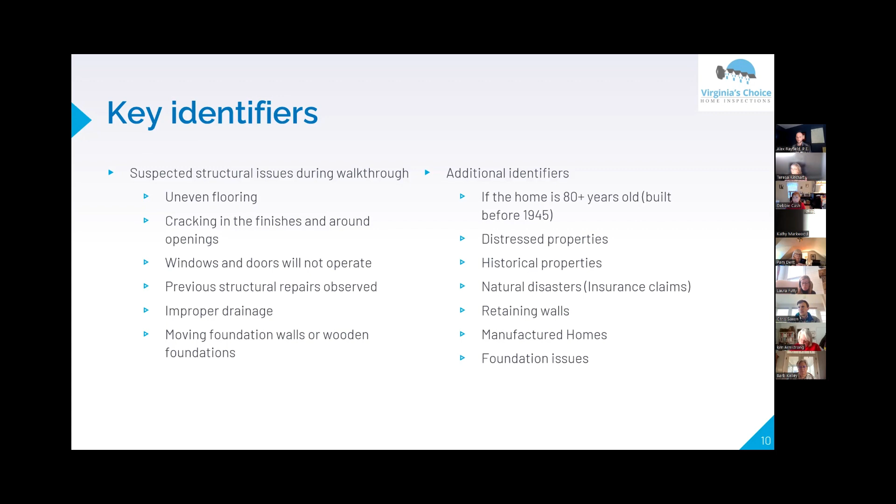A big one is once we get before 1945, the end of the Second World War timeframe, we saw a massive shift in how homes were built and the requirements from local governments and codes that came into place post-World War II really changed a lot of how building was done. So knowing the age of your home and the type of property can really help hone in on who we need to bring in later.

The first one I want to show briefly, which we've all seen before, is a little marble trick with some sagging or overspanning floor joists. This is an old farmhouse, I'm going to say from around 1860. Obviously the centers of the floors have deflected quite a lot, allowing the marble to roll freely across the second floor.

This might not necessarily mean there's something drastic to correct here, but it could key us into different types of framing methods, whether folks have been exposed to what's called balloon framing versus platform framing. That goes back to 1945 and before, even a bit before then.

Balloon framing is an old style of framing that we don't use anymore. It is not as resistant to lateral loading, wind, or seismic loading as can be seen in structures. Because of that, over 90% of balloon frame structures are no longer standing, or have been renovated into platform framed structures during a massive renovation, if the structure was well enough to take it on.

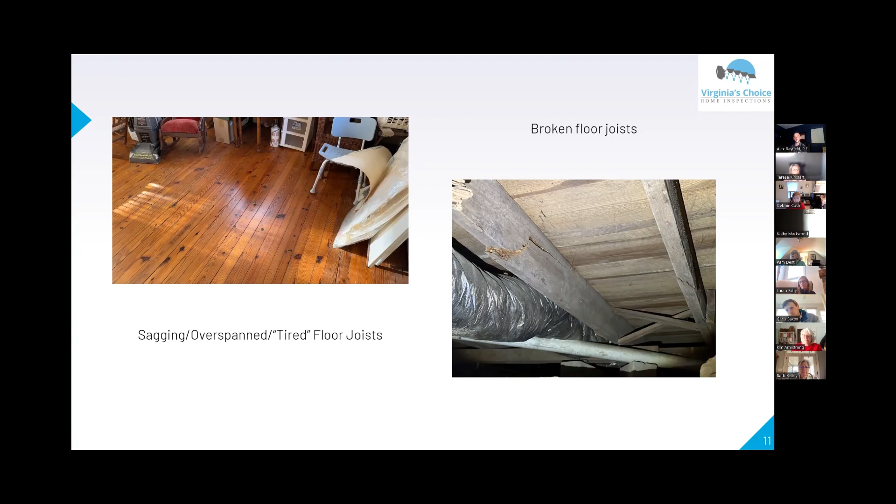The next thing: non-permitted residential renovations. This can be a tricky one, as there are a lot of contractors out there that flip homes. Many contractors do this very, very well, but there are always outliers that try to get one over on folks.

I was hired as an engineer, and I went back through county records and saw that no permits had ever been pulled for this renovation. It was a contractor that flips homes who had purchased the property a few months before, and 6 months later the house looked completely different and was back on the market.

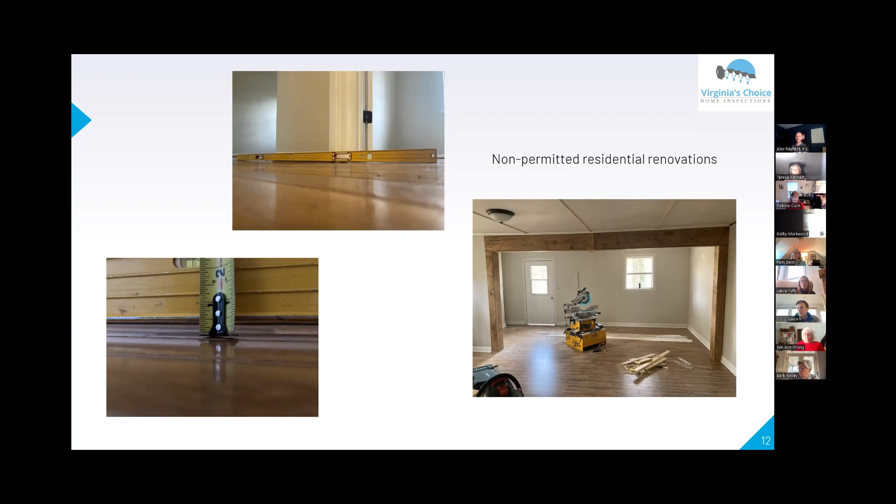There were a couple of lolly columns, very obvious in this case, that had been taken out of the centerline beam and just thrown in the corner—they didn't even take them out of the structure. This was a very obvious one, but it saved somebody a lot of time, money, and headache, since they really didn't have the time to take on something like this.

The next one, our lovely fights with the plumbers. I know just about every home has something like this at some point, depending on the amount of renovations and additions it's had. But if you ever see any cut floor joists, especially like the one we see on the right...

Then we might want to consider bringing in somebody with structural experience to prescribe a fix. More often than not, the fixes are relatively easy, painless, and cheap—sometimes only costing a few hundred dollars to fix one of these floor joists, depending on the amount of ductwork, plumbing, other penetrations, and accessibility involved.

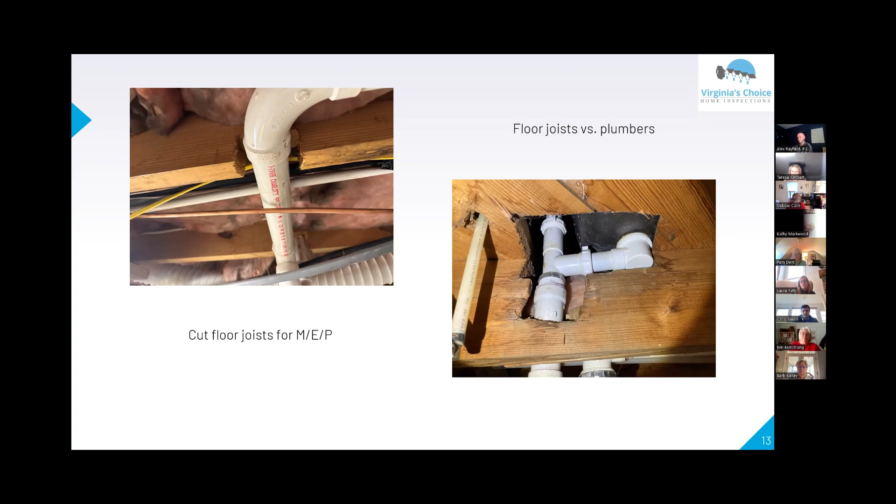But over time, if these things are left unattended and improperly supported, we can absolutely see unexpected deflections in the floor, cracking in finishes, and plumbing leaks starting to occur, depending on the type of plumbing piping—whether brittle or flexible. So just another situation where, if you see these things during a walkthrough, give me a call.

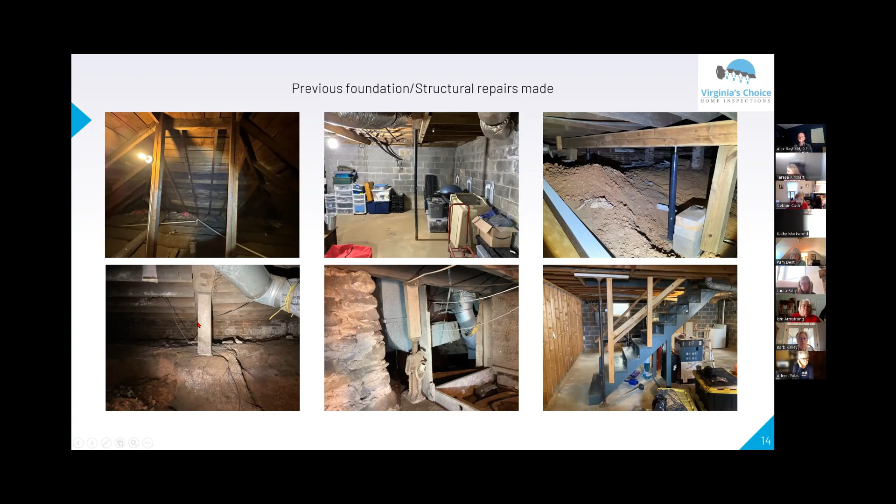So this is a good area showing where we had some previous excavation that I was able to confirm through other things that happened during this inspection, and then was able to get this remediated because the entire center line of this house had sunk about 6 inches. This was a very distressed property, which we'll talk about in just a little bit.

At the end of the day, the number one force against a home is water. It will always be water. And the more we can do to keep water away from a home, the better it's going to stay in its current condition, and the longer the materials used in that home are going to last.

The house I'm showing here, this is all from the same house. This was a house up in Lake of the Woods, in Locust Grove, a little north of us.

But the community did a renovation of the golf course at some point, and when they did that renovation, this existing home had a lot more surface water shed off of the golf course and onto its property.

And what happened when they did the renovation of the golf course is they worked with the homeowner to install 6-foot French drains. I forget the spacing, it was like every 15 to 20 feet throughout the yard.

But what happened is over 30 years, these rock and earthen French drains clogged up, and the homeowners themselves did very little maintenance on this house over the past 30 years.

Ivy growth was rampant throughout, it was inside the house as well. They were very natural people, as we want to say, so they didn't want to take the ivy off.

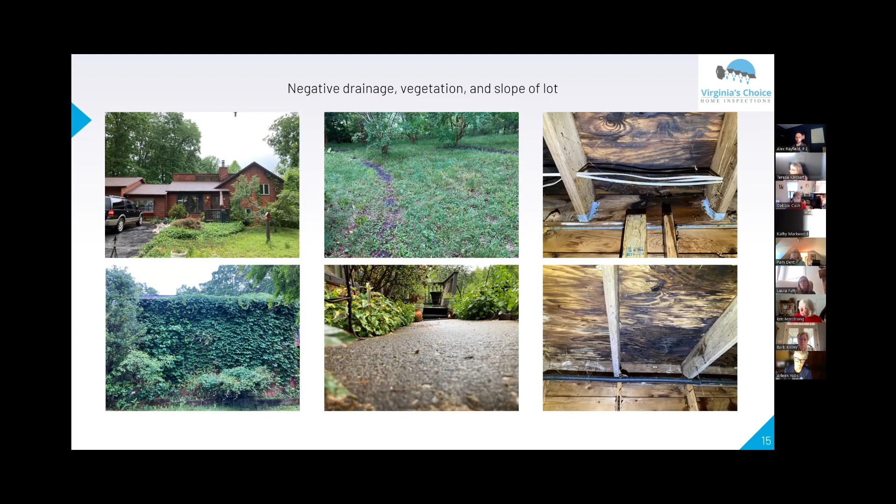Especially since most of the time we're coming into these homes with very little knowledge of the life of the home. So before we go and make structural repairs, we need to take some time to view the home and see how the home acts.

So distressed properties, moving on to distressed properties.

So here's our- I knew he'd come and say hello at some point.

Distressed properties. This was a home over in Waynesboro. It had been in the same family for 100 years, but it had sat empty since I think the 80s.

And I was brought in to do not only a home inspection of it, but an overall structural assessment to see what it would really take for this home to be essentially gutted, renovated, and brought back to life.

So I was able to come up with real life numbers, working not only through the home inspection, but contacting contractors, getting contractors lined up to come out and give quotes and get reasonable expectations.

A dollar amount of what it will take, depending on if you want to go to the nth degree in finishes, to just the bare minimum of getting everything back in good condition with, very typically, I would want to say, rental finishes.

Also very important, this house had 4 different types of foundations. It had a wooden foundation that was at grade and was sitting on top of just bricks randomly placed around.

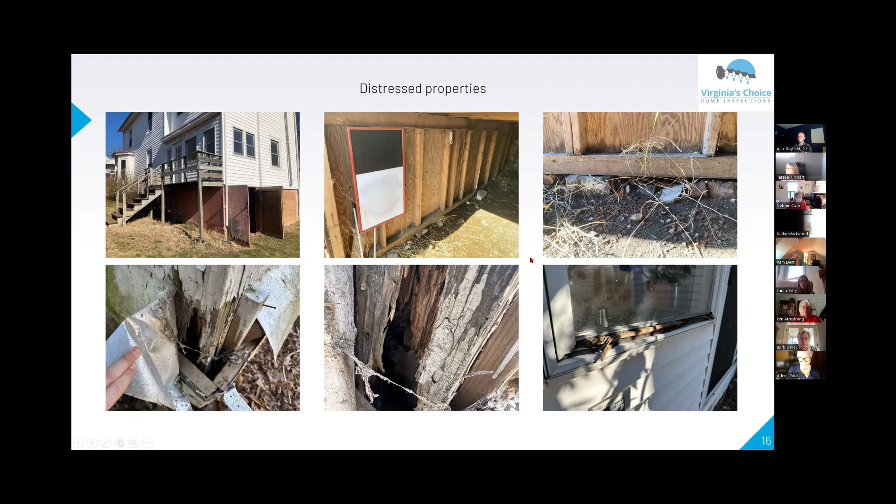It had poured concrete, it had masonry, and then it had a brick foundation as well. That tells you how many additions this place had, and how old the original structure itself was. So a lot was going on here, and I was very happy to come out and help these clients with this historic property.

There were some repairs that needed to be made. Homes like the one shown here, the one on the left, we've had a lot of foundation issues. I'll get into this one a little more, but it's just gorgeous. The entire house, all three stories, has original banisters, original floors, and original plaster from the 1840s. Very, very cool property.

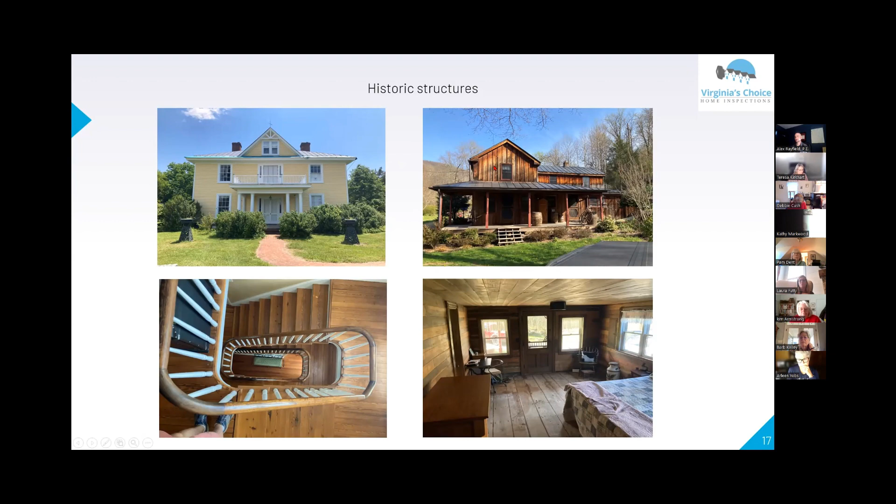This cabin in Free Union has original chestnut floors from the 1880s. Very fun project, and from the exterior, overall, everything was in good shape. But in the crawl space, I found where a natural spring had actually been allowed to flow under the house for almost 100 years. So I had to work with a contractor I do a ton of work with to move the spring, put in new retaining walls, redo the grading, and essentially put in an entire new foundation on this cabin, to ensure the new owners and their family can use it for another 100 years.

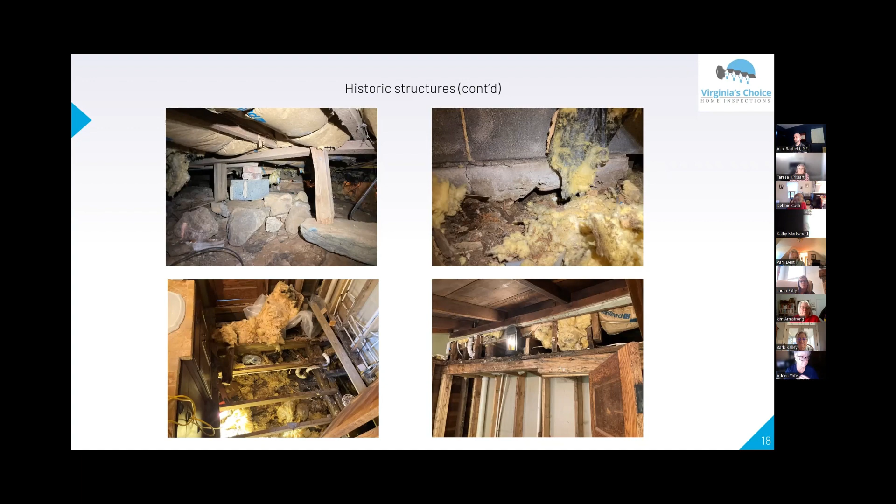Now for some of the more unfortunate things, the natural disasters. This client was referred by their realtor after a tree fell on the house last year during some very high winds. I was then hired through their insurance company to come out and do a structural assessment of the home, determine what was structurally deficient, and prescribe fixes to get the house back into its original condition. Very unfortunate work, but it's something you can let your clients know: if bad things happen due to Mother Nature, we've got your back. We've got people we know who can be out there immediately to help you move forward after a disaster like this.

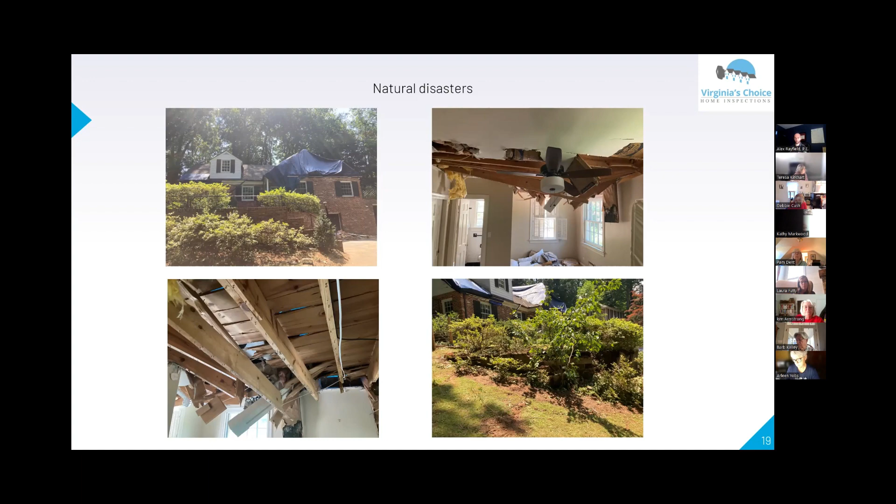Failing retaining walls. Retaining walls, and how they're built and allowed to be built, has changed drastically over the past 25 to 30 years, from what a contractor was typically allowed to do, versus what a contractor is allowed to do now, versus having to get an engineered stamp before installing the actual retaining wall.

The home we're looking at here is an extremely nice house in the Earlysville area. The top left photo is taken from the back deck, so we're looking almost straight down, and you can see how high above the fencing we are. There's a two-terraced level of retaining walls. This retaining wall was put in around 1995 or 1996, right about the same time all these code changes were happening with masonry retaining walls specifically.

To no fault of the homeowner, their drainage and typical maintenance of the home were in very good shape; they've done a very good job over the years keeping up with this home. But just due to the construction type of the masonry retaining walls, the walls had started to bow in and fail. It was simply because of outdated construction methods, and we needed to ensure this extremely nice pool area is kept in the same condition for another 25, even 50 years.

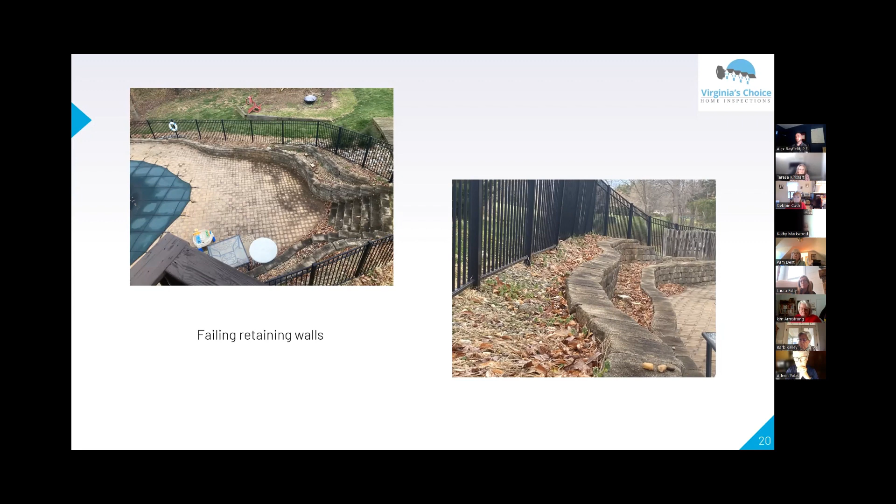Then there's manufactured homes. This is something some folks don't have a lot of experience with, and it can be difficult to find structural engineers willing to come out, inspect, and certify manufactured homes, especially to the HUD manufactured permanent foundation guides, dealing with clients buying a home with a USDA, FHA, or VA loan. More often than not, these types of inspections are required by the lender to get the home sold. Just know that Virginia's Choice Home Inspections can do these types of inspections.

If everything is in good shape, the turnaround time for the report is usually the same day. If there are repairs that need to be made, we just go back and forth with the contractor, get those repairs made, re-inspect, and once everything's in good shape, issue your certifying letter, and you move on to closing.

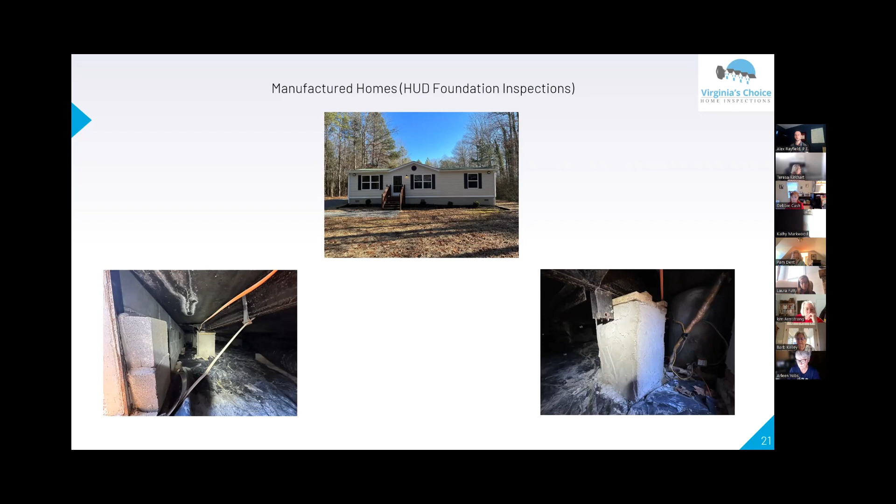Then some of the ones that probably stick out the most in everybody's mind are bowing foundation walls. There's a lot of homes around here that have masonry or concrete masonry unit, CMU, foundation walls. I like the one shown here. It's a very extreme case - I could almost fit my hand through the interior face of the block and touch the exterior face of the block. This wall was bowed significantly.

I actually told the homeowner, hey, you've got somebody renting in here, this needs to be addressed immediately - the floor system, the roof system, everything with this house was affected by what was going on and the amount of water intrusion that was being allowed in. This was one of the most extreme cases I've found needing an immediate repair. We were able to get it done in the next 3 months, and everything's back to how this house was, like it was built in the 60s.

When I talk about elevated hydrostatic pressure, up on the top right corner, what that means is the amount of water pressing against the wall from the ground. These older homes that have ungrouted hollow block masonry walls are only designed to take a specific amount of lateral pressure. If we exceed that due to bad drainage, improper grading, gutters that don't work, deferred maintenance, or any number of things that can push water towards a foundation, it's very easy to see cracking like this.

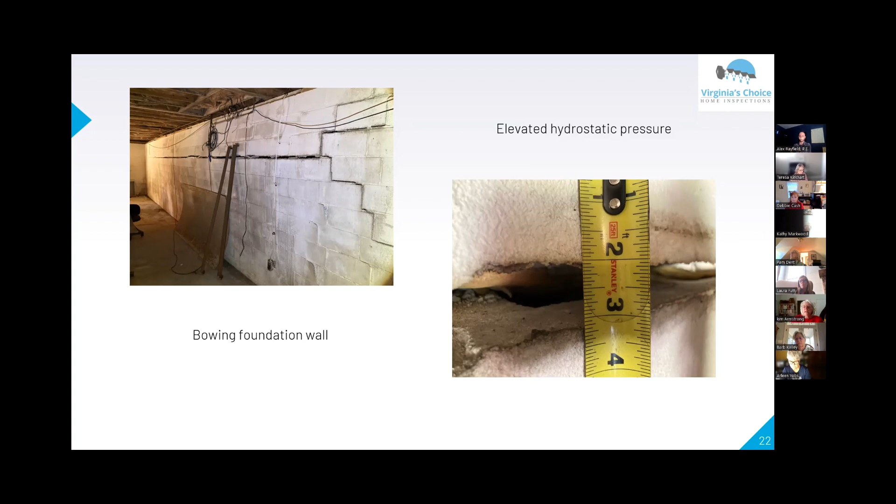In different situations, we can prescribe different fixes. At the end of the day, I would always heed - there are companies out there that will come out and provide a free quote. These companies are also trying to sell a certain product that their company sells. I always advise realtors, lenders, anybody involved with the transaction process of a home or commercial space, to maybe not go with that free quote right up front, because it's free and they can get out there in a couple days and likely will prescribe something that might not be the correct fix for the job. I always stress, call a structural engineer.

We are not there - any structural engineer, if they are doing their job correctly, with the right code of ethics and morals, we are not there to sell you on anything. I'm there to educate you on what is the right fix for the situation at hand.

I am a person that is very much, let's think about this logically, let's think about this in very simple ways to get to the end goal that keeps everybody's well-being, safety, and their wallets in mind. Because there's a lot of these foundation contractors where we might need a very simple $5,000 fix, but a lot will come out and say, hey, we've got this massive issue, your house is out of plumb by 1.5 inches - which every house is out of plumb. This just happens as we load soil. Things are going to move differently depending on what we have, and being in the mountain areas, we're usually not building on very flat lots. So a little bit of movement is expected, from the design standpoint, all the way through from the first drawing, all the way through the end of construction.

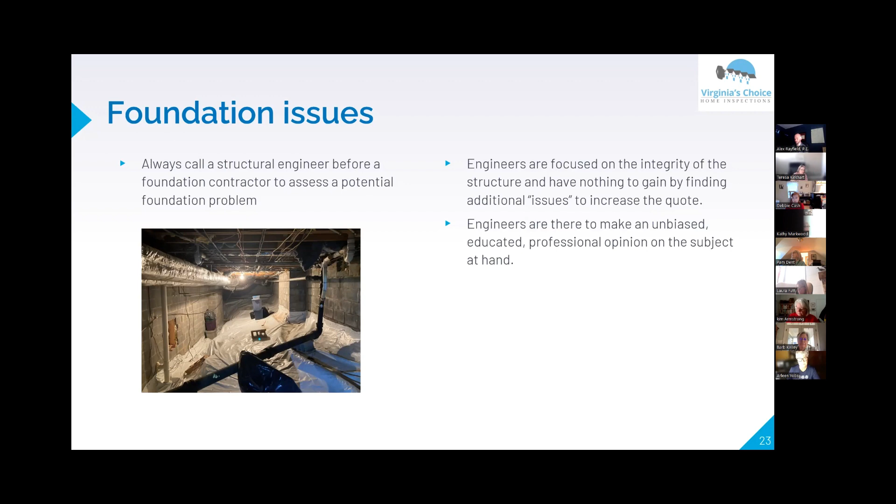So lots thrown at you right there—just a little bit of the common things we see in residential structures in Central Virginia that I wanted to make you aware of.

So why choose Virginia's Choice Home Inspections? I think I've sort of beaten the dead horse here a little bit, but the added value of having a professional engineer is a much deeper understanding of building science, which is different from just the materials, which is different from construction type. It's understanding how the entire building envelope, inside and outside, works together to keep you comfortable and safe in a home.

An extreme added value is, say we come into a home inspection with no known structural deficiencies or anything we've seen previously, and then we find something. Hey, I'm already on site, or my other inspector is already on site, so you don't have to hurry or potentially compromise a deal trying to find somebody to get out there in a short amount of time.

Because we're already there, if we do find something, I typically like to run through the entire home inspection, bring this to the buyer or seller's attention at that time. Then they can elect to hire me as the engineer at the end of the home inspection to come back through the entire structure right there and provide a structural assessment.